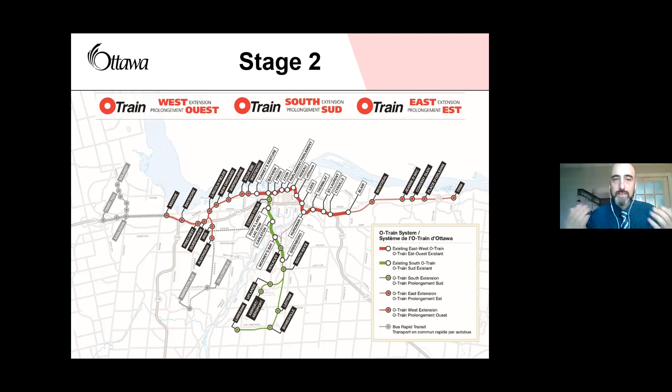The stage 2 project is an extensive and inclusive project. We take people all the way from Moodie to Trim in the east - that's an incredible feat. In the east, we only have 5 stations, whereas we have a multitude more elsewhere. We'll go into details here. In the south, we extend all the way down to Limebank, Bowesville, Airport. These are the major connection points as we bring more people into the city with the ability to get across downtown and out. This is the bread and butter of the stage 2 project.

In the west specifically, we have 11 stations and 15 kilometers of new track. For those of you who have the pleasure of living along or looking onto the river over the Parkway, or if you enjoy using the pathways and that infrastructure, when this system opens, approximately 500,000 bus trips annually will be removed from the SJAM Parkway. That's something special for a lot of people, even if you don't live there, I'm sure. That's a really nice bit for this.

Also worth noting is a tunnel from Kichi Sibi all the way down to Lincoln Fields, and another smaller tunnel in the Connaught Queensview area. Those are how our train is going to, after construction, impact fewer people and not impact connectivity, ensuring grade separation. It's all part of that.

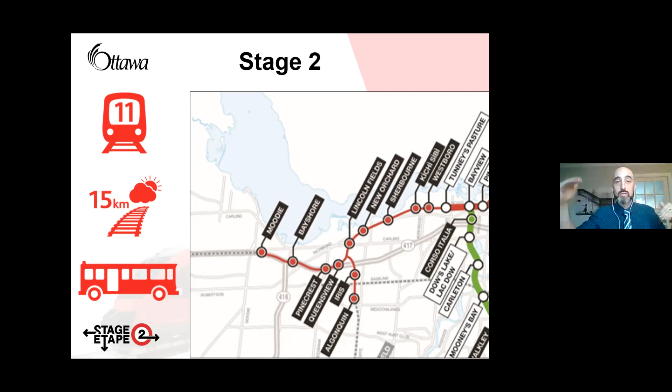The project is a design, build, finance project. We have Kev, who won the contract and signed to deliver the east-west extensions. T-Next is delivering the south extension, but that's not the topic of conversation today. Rideau Transit Maintenance is contracted to maintain the entire line, not just the 12.5 kilometers they built and opened in 2019, but the full breadth of the system from Moodie to Trim, as well as all the vehicles, current and new. That's to avoid any complications with, well, that was your train and that was your track, and who's going to fix it? Hopefully there won't be any of that with this model.

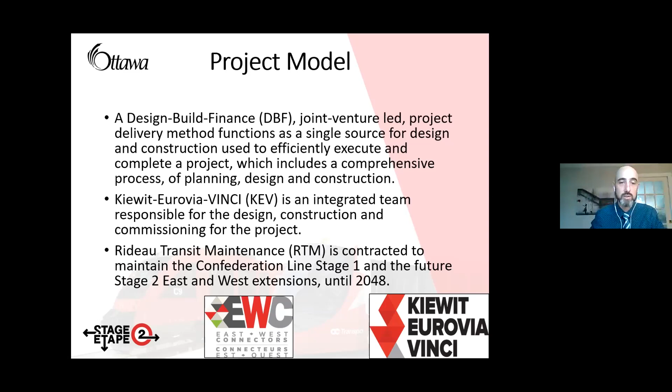I put this in here because I've received a lot of emails, and this is more of a housekeeping note. I understand impacts are great, especially right now in the Byron area. I've heard it, I understand. With 7 days a week of work, with hole ramming and rock breaking occurring on Saturdays and Sundays, it feels like not a lot of respite.

I'm sorry. Many of you have asked me, and many of you have asked Councillor Kavanagh, to have a day of rest, to force Kev to have a day of rest. Unfortunately, I'm not able to do that, Councillor Kavanagh's not able to do that, and Mayor Watson's not able to do that. The reality is constructors - LRT, home construction, road construction, you name it - have the right to work 7 days a week if they so choose. Ottawa city bylaws preclude and restrict overnight activities without the affected ward councillor's support, but there is literally no mechanism within the city to stop weekend work.

If you wanted to email your MPP, Jeremy Roberts, or contact Premier Ford, that is certainly an option. But unfortunately, we'll get into that more, what's going on. I just really want you to know what is and what is not within our scope and purview to assist with. I thank you for that.

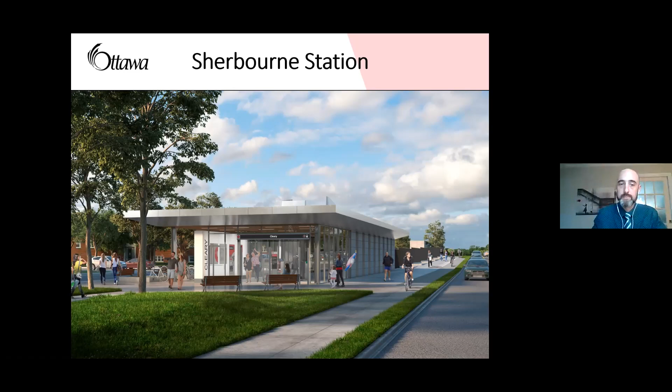The 13 days feels impactful. It is. Pedestrians and cyclists will continue to have the ability to cross the work zone safely. Vehicles will not. For vehicles wishing to cross the area in the west, the signed detour is Croydon Avenue, and in the east, the signed detour is Churchill Avenue.

A notice will be delivered. We are finalizing the information. Once that comes out, more precise information will be shared and posted online.

There was one other point I wanted to make about this - there's going to be quite a bit of impact, as we've seen with the Woodruff water main works that are occurring here over the last month.

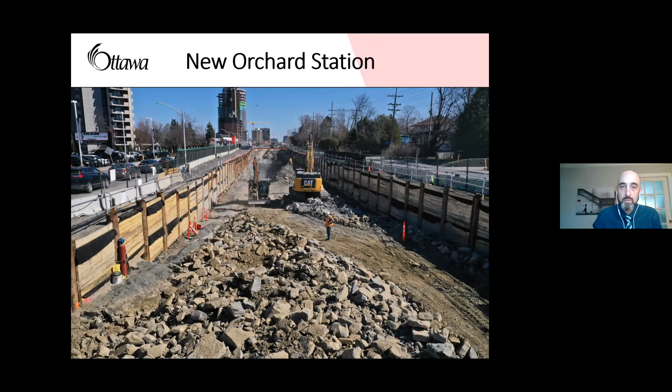Now, New Orchard Station is a station with 2 PPUDOs, 2 passenger pickup and drop-offs, just right here with restricted times. A little update for the community.

If you haven't seen my emails, there will be no other formalized parking on Byron west of Woodruff. I know there was some miscommunication with what was on our website, and I believe that has been resolved. We did have some issues with IT removing our information without telling us.

It's neither here nor there, and I apologize for any miscommunications the community had as a result. There will be 5 fare gates, 2 elevators, as with Sherbourne, 20 bike parking spaces, and 4 benches.

Clearly, it is an open air station. That means there is no roof to the tunnel. There will be shading or coverage above the platform.

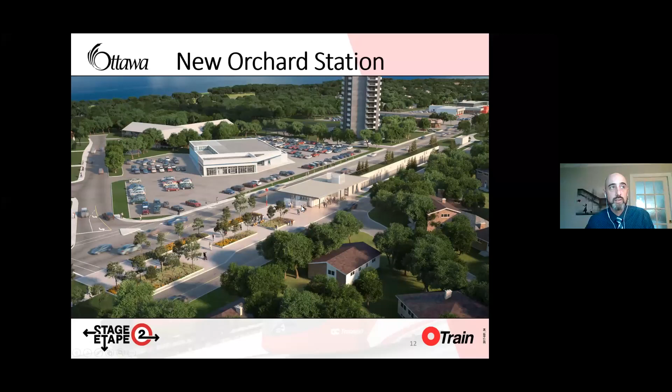As you can see, the only thing above grade here is the head house, the elevator shaft, the entrance, and fare gates. The rest of the infrastructure is all below grade.

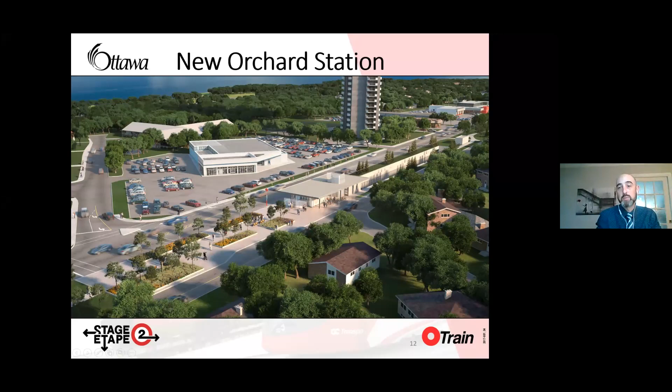Construction will begin in '21 and will be completed in '23.

They anticipate this 6-week work package to occur between May and July, pardon me. It is a 6-week package, with each section broken up into about two weeks each. Please understand, construction schedules do have a tendency to shift.

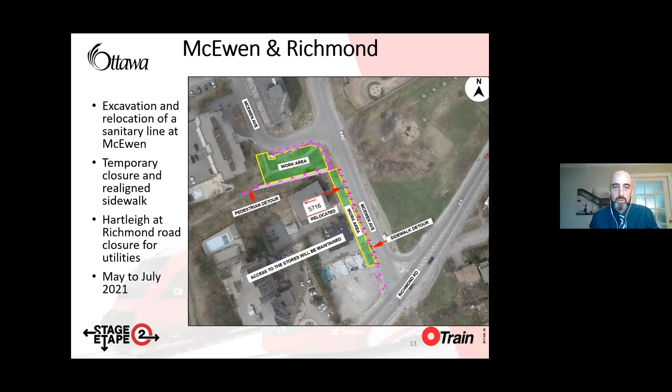Edgeworth storm, sanitary, and water relocations and replacements. Work has recently begun and is anticipated to continue until August. The work is to replace the storm and water, relocate storm and sanitary, and replace water.

Temporary widening has occurred over the ditches to allow for local vehicular access to driveways. The final paving of the road will follow the completion of the work.

Now, there's something else I wanted to mention. Driveways will be blocked, some periodically for 1 to 2 days, generally in a section of about 2 driveways at a time. This could occur up to 4 times.

This is not because of KEV. This is the way utilities are replaced and realigned underneath roadways, one at a time: dig, replace, fill up, dig, replace, fill up. It happened in front of my street on Iona. I didn't understand it at first, but now I do.

Hopefully, if you have any questions, you can connect with me and we can walk you through that.

Something I want to point out right now, something that has been in the works with KEV and the city, in order to help minimize the impact of construction vehicles on these streets. We are reviewing a plan, not yet finalized, to have KEV construction vehicles access their work site through a right turn, southbound, into Edgeworth.

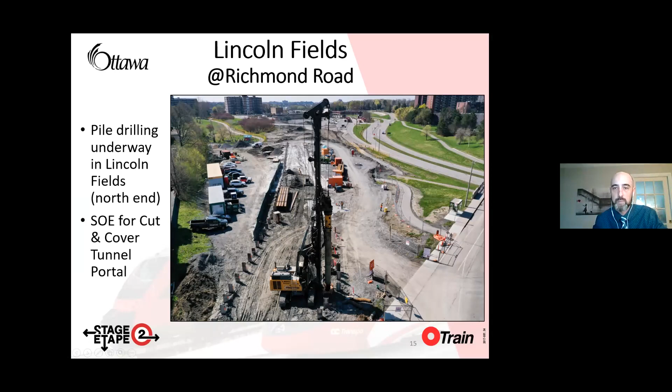Utilities are ongoing on Carling. You may have noticed some roadway realignments.

Lincoln Fields Station work started. It's pretty exciting, with pad installation. That's a huge moment, I'd say. That's what we're doing.

So to point out, MUP construction on the south end of Carling in May, Lincoln Fields Station, the existing transitway station, will be reoriented and completely rebuilt to function as a new LRT station. The train platform will be located under Carling Avenue. There will be 3 entrances: a station entrance from Carling Avenue, and an entrance...

Yes, a shared entrance between the fare paid side and the pedestrian side, as well as one on the west side.

A signalized pedestrian crossing of Carling will also help with safe crossings of Carling Avenue. And the existing terminal will be reconfigured to accommodate the passenger pickup and drop-off area.

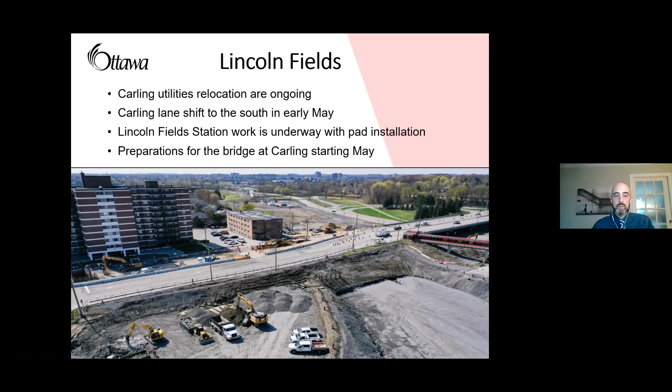This next picture will help demonstrate the future MUP connectivity around the infrastructure, Lawn Avenue Parkette, down along this way. Here we have a signalized intersection just where the MUP comes up that borders Rosewood Avenue. And this here is the passenger pickup and drop-off area that I just described.

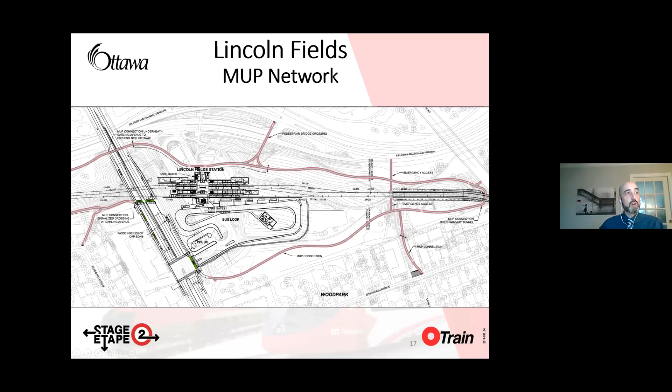This is the existing Woodruff Pedestrian Bridge. It will be replaced as part of this project. It won't be decommissioned until the new bridge is constructed. That new bridge construction will begin in 2021 shortly and will be completed in 2022. Once that occurs, we will commission the new infrastructure and decommission the existing bridge.

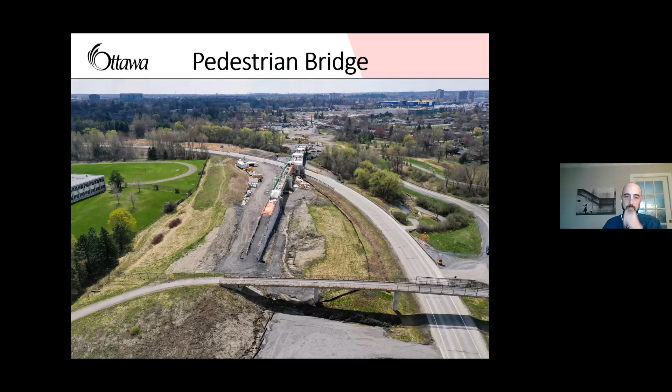And as we just saw from north of Carling, this is the current pedestrian bridge. This is the new alignment of the pedestrian bridge, connecting to similar MUP infrastructure, new pathways, and new connection points. Now the Connaught split structure, you can see right here with walls, retaining walls, decking, work ongoing.

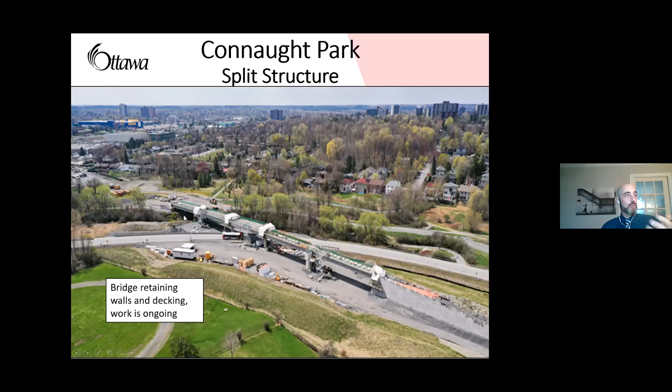So it's pretty incredible to see this level of progress on this project at this stage of the game. I think so. I actually will just go back.

No, I did get an email today from someone who was walking the pathways in and around this area. They noted that they were impressed at the progress, but more so, they were walking their young infant, well, maybe not so infant, but 9 months along the pathways. And she noted that some parts were less pedestrian friendly, but still manageable with a stroller. And then she pointed out that there were 2 flag women on radios who were beyond friendly, beyond helpful, and took the time to write into the office to tell us this.

I know that there are a lot of negative impacts to the construction of this project. Nobody really feels the need to give kudos. It's nice to hear every now and then, and I wanted to share that someone had a positive experience around the construction.

Queensview Station, here we have the Highway 417. I don't know if you got this, but here's our new highway signage. It's recently been replaced, a smaller sign with a much larger sign.

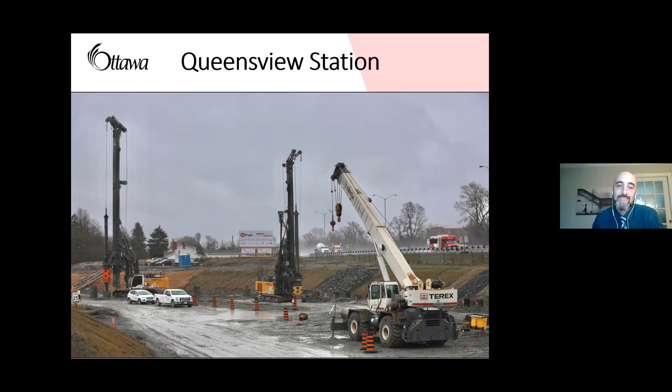Drillings of soldier piles can be seen at this location, and the soldier pile drilling is going to progress east into Connaught Park. At this point, it's still here in the Queensview Station area. Pile drilling underway through the summer, working up to Connaught Park, utility relocation underway, and pedestrian bridge utility relocation is ongoing. That pedestrian bridge relates to this pedestrian bridge for Queensview Station.

So just again, relocating utilities, which is part of our project to get the work done.

Now, Queensview Station is a new station. As you can see, it's just north of Highway 417. The station is going to have one entrance. Sorry, I keep pointing it on my other screen, so I do apologize, but this is the station entrance. And a new public access pedestrian bridge over Highway 417.

And access from the enhanced multi-use pathway and sidewalk system to allow access from Queensview Drive and Queensview Terrace North communities. And station construction will start in February '22 with a completion date of fall '23.

From Pinecrest to Moody, the activities start to repeat themselves. So we have a number of interchange or highway ramps that have been closed or require closure so that we can bring the alignment west or east, depending on which way you're talking. Right now we're talking west on the north side of Highway 417. So with ramp closures, sometimes it's just short-term overnight closures, and other times we're talking 9 to 13-month closures.

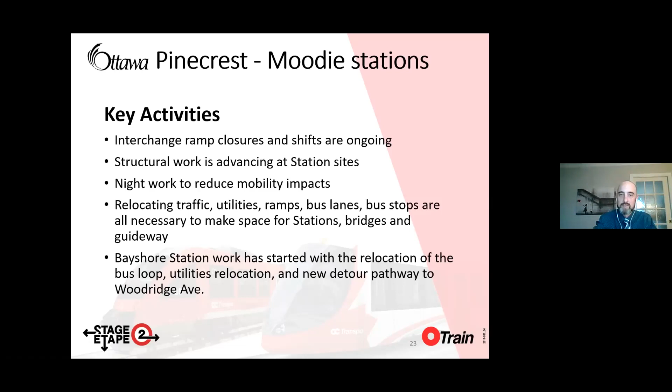Future Pinecrest Station, bridge and ramp construction work is ongoing. Summer bridge replacement. We'll have temporary road closures, and the ramp closure is in place, currently in place through December 2021.

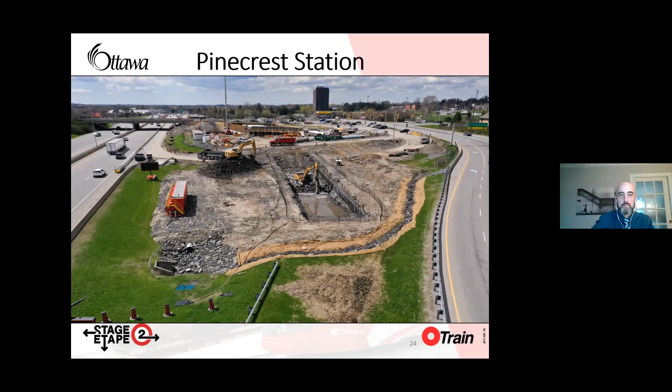And here we have bridge structure work progressing with parapet and concrete deck installation. I am blown away by this progress.

Having done a drive with Kev last summer, and talking about what the plan was for this, that's an incredible feat. Just pointing that out.

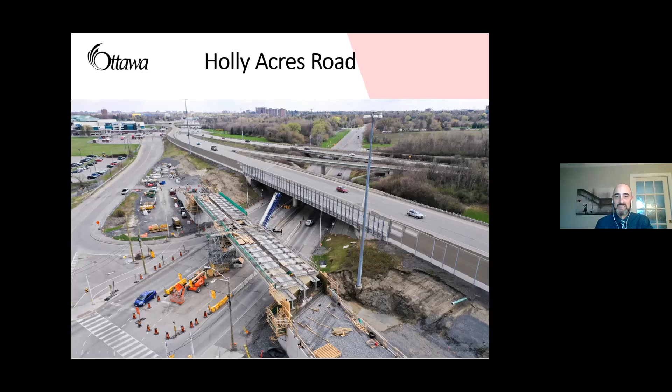At Moodie Station, we have new ramp construction ongoing with a ramp flip expected this spring. Moodie bus station area relocations to start in May through the summer, and night work in this area is ongoing.

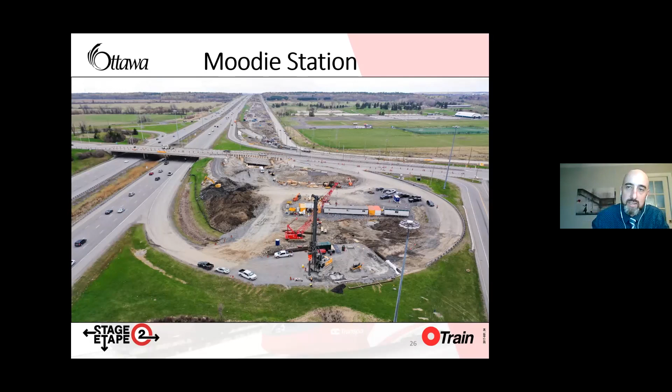I've received a few emails as of late about Moodie Bridge and the cycling conditions. I haven't replied to those emails yet, just working on this presentation the last couple of days. I will reply. Thank you.

Paul, Ian, thank you. The rail office had requested Sharrows be installed as part of our temporary detour and temporary works. Traffic services, the city of Ottawa, told us that Sharrows were not an appropriate function for the space, and instead to use share the road signs, which is what we've done. What we are happy to do is return to traffic services and inquire if they want to change their position, at which point we'd be more than happy to introduce Sharrows onto the road.

And I got the impression from those emails that that is something you'd like me to do. So that's something that we are going to do.

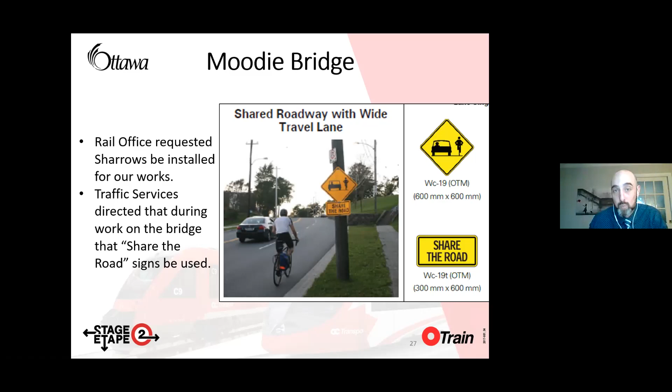Moodie Station area has a bus loop relocation, bus lane work, May 2021, with bridge work that is underway and is the cause of those emails. For those of you who use that bridge, you understand. If you don't, then we don't need to go into that for you. But we are working on that, and we do review it, and we do appreciate your comments, because it really helps us ensure that all the TCPs, or traffic control plans, if there is a shift, if all the elements have been adhered to. Sometimes we tweak our plans based on your feedback, and we thank you for that.

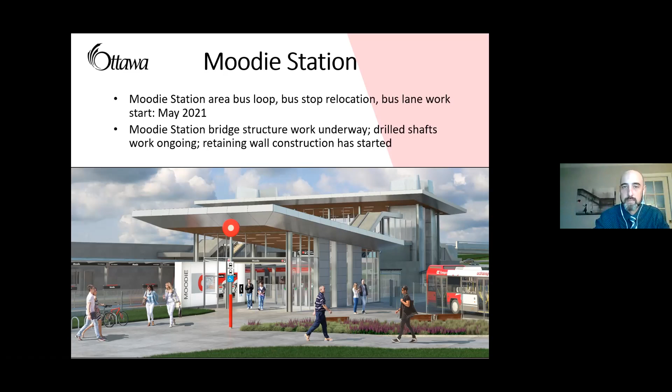The LMSF, or Light Maintenance and Storage Facility, construction to start in April of this year with rebar, concrete pours, and structure. More utility relocations, and Corkstown Road realignment.

That design is not yet approved. I understand that a lot of you have been waiting and asking for a year for that design and answers. And I'm not trying to be flippant, I'm not trying to stall. But if a design's not approved, then there is no design and there's no information for me to share. I anticipate in the coming weeks, and I'm excited to say this, I heard something on a call today, that there's going to be some T's crossed and I's dotted. And that will be an opportunity for us to advise Councillor Kavanagh, her office, and the community at large. I thank you for your patience while we wait for this information.

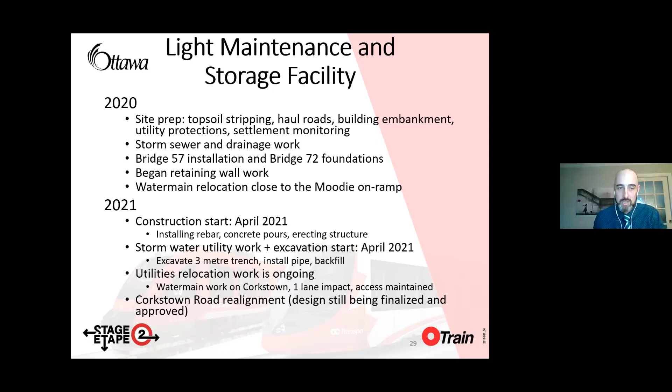Sand, Damon? Why would you have sand in a train? Well, sand helps grip of metal wheels on metal tracks, and trains have sand.

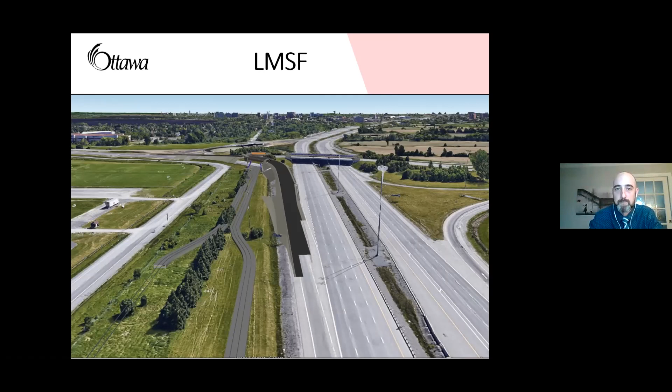I now have some news that I do not like sharing. There was a connectivity review, or connectivity 2.4, that was undertaken in 2020. In 2020, it was proposed that we could consider a MUP on the west side of Moodie Bridge. At this point, that MUP will not be built by East-West Connectors, or KEV. The cost to do so would be too high. But Stage 2 believes in this connectivity, this piece of infrastructure. And we're reviewing an opportunity to construct this MUP ourselves.

We don't have any finalized solutions yet, but we are pursuing them. So while we are not delivering this as part of the Stage 2 project with KEV, we do hope we are able to deliver this element of the project for you, as we do believe in the importance of this connectivity. Furthermore, transportation planning is leading a feasibility assessment of extending this MUP along the west side of Moodie from the bridge all the way to Bell's Corners. So that would tie in.

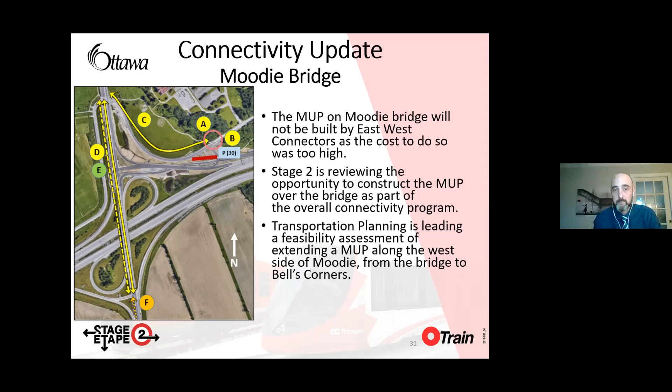Okay, some facts, some impacts, and some mitigation. Daytime operations, 7 a.m. to 10 p.m., Monday to Saturday. Generally speaking, even Saturdays, not that often. 10 p.m., not that often. Mostly, KEV, like you or me, when we have the option, likes to close shop and go home to their families at 5 o'clock. When schedules or other things necessitate, they might have to push that, get another crew to work until 10. That is not their interest, not their day-to-day.

Sometimes it's required, just as night work sometimes is required, but mostly it's not. KEV doesn't want to do night work if they don't have to, and they don't relish impacting residents. Night work costs more money for KEV to undertake. KEV is building this project for the city for a profit, so obviously it doesn't make sense to spend more money when it's not necessarily needed.

Connectivity will be maintained. There may be delays, there may be detours, but connectivity will be maintained. Your safety, worker safety, is paramount in the eyes of KEV, in the eyes of the city, in the eyes of your councillor, and in your eyes as well. We respect that you respect construction signage, and we thank you for adhering to those signs during this work.

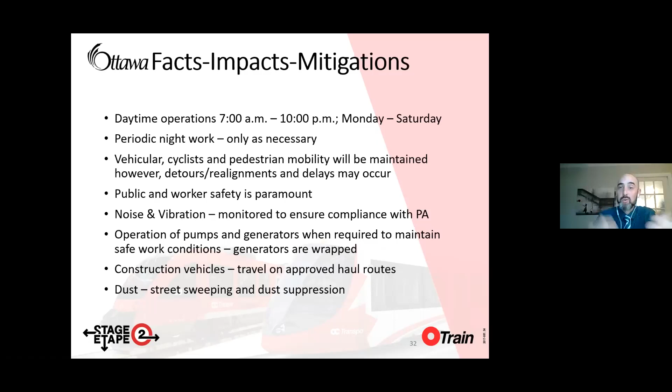Lastly, dust. I think it's going to be a warm, dry, dusty summer. Kev will be managing dust suppression as well as street sweeping. We are looking to you to let us know: do things get really bad on the weekends when we're not around? Let us know, and we'll make sure suppression efforts are made. Are there areas we haven't addressed that need addressing? Let us know again, we're partners in this. We're team members, and you help me, I help you, Kev helps us. It's important we all play our role.

I talked to you about overnight work a few slides ago. Truly, there are emergency situations, sometimes scheduled, but this is not the day-to-day. It is not expected. In our project agreement, we encourage work to occur in the evening or overnight when it could impact our mobility on the roads. So that's by our own doing, to support the city.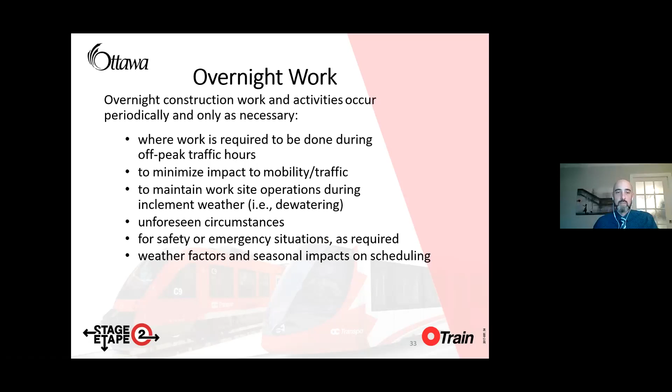Lastly, my name is Damon Berlin. This is my contact information. Many of you have it, some of you don't—please record it, and please feel free to use it. It's important that I understand the problems, and that I can communicate with Kev what you share with me, so hopefully we can find resolutions. It's not always possible, but I'll always endeavor to give you a strong rationale as to why or why not we can do what you're asking.

At this point, I'd like to thank you all for listening to me drone on for the last 40 minutes. This is not an easy thing to do. In person, I like to feed off the crowd. Right now, I feel bored of my own voice. So I'm sorry, and I thank you.

Councillor Kavanagh: Thank you, Damon. That's a lot of information to put into 40 minutes. I've noticed that you've responded to the questions we've received, in a very broad way, and also in some specific ways. So I'm going to start, and because we've got a ton of questions to go through, I am just selecting the questions. I'm sorry, but comments, Damon can look at them and read them, but we're going to just go with questions right now.

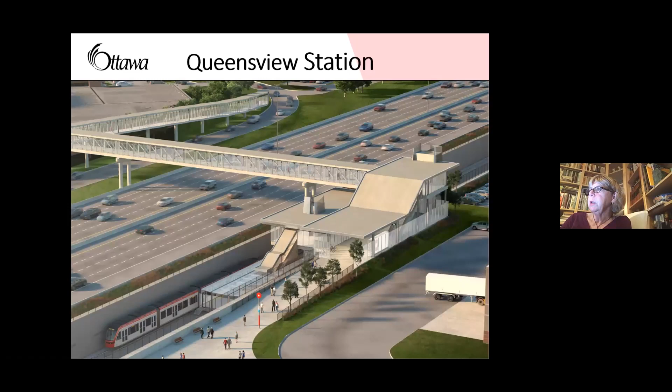Someone's asking about slide 6, because this was asked during the presentation. Can you clarify what the green path between Richmond Road and Lincoln Fields Station means? When exactly does the train go through from being tunneled to above ground? And if the train becomes above ground abruptly south of Richmond Road, how will the path connect under the bridge once the train exits?

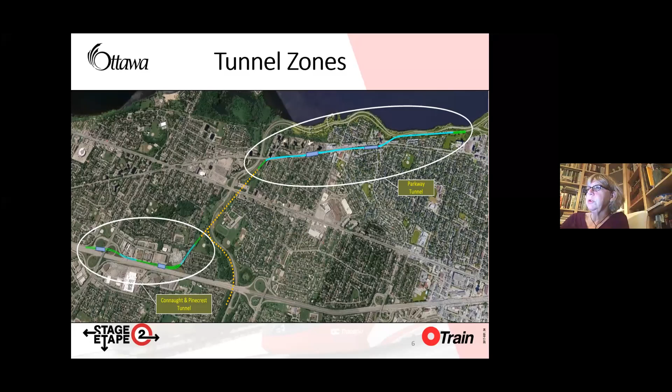Thank you. And for the pedestrian area for the work zone for the 13-day closure of Woodroffe, will they be monitored by police for safety?

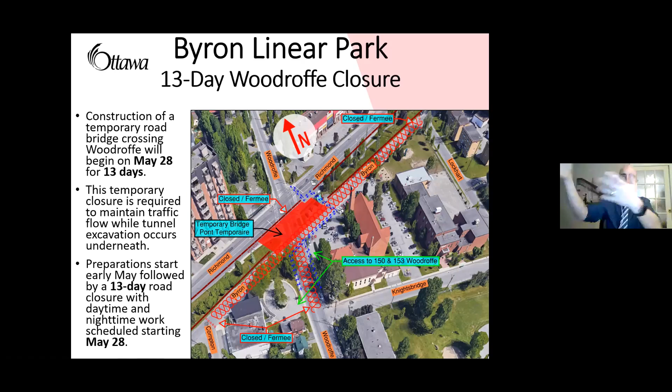Safety - so this right here, this is through a work zone. A work zone is monitored by constructors. They are required to protect their spaces from errant pedestrians, cyclists, or kids. You'll just imagine a fence, and you'll walk through a fence corridor. For any of you that existed around Bayview Avenue, Bayview Station construction in stage 1, many of those MUPs went through construction areas. At that time there was work over them, so there were shields above and fences on either side, and that's how pedestrians will get through.

Campbell, I don't think police are required for this closure because it's static, but I will defer to you, sir. That is correct, Damon. So once this closure goes into place, we are going to be in a static operation - there's not going to be 24/7 police presence for the entirety of the 13-day closure.

There will be police required when we instate the closure and when we remove it, as whenever there is a special need to control traffic at a traffic signal. But once the zone is set up, it will be set up and left there. And as you say, Damon, it's the contractor's responsibility to secure their work zone, and consequently it will be secured to prevent any members of the public getting in there accidentally or otherwise.

I would like to point out, thank you Campbell and thank you Councillor, but this is a very important thing for the community. I know that things happen - fences fall down, people push them, wind pushes them, whatever the case. You're my eyes on the ground. If you see something that is unsafe, you need to let me know. Jaimie is a responsive individual - I get him on weekends, at nighttime. Councillor Kavanagh is always emailing me on weekends, and I'm quickly sending them over to Jaimie. I got great people here, and they're looking out for you, and so am I. I want to thank you.

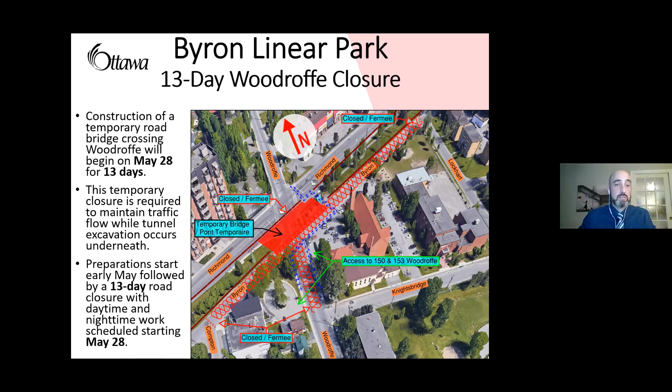Thank you. Will there be any parking at Lincoln Fields Station? There will be passenger pickup and drop off at Lincoln Fields Station. Much like now? Yes. It's not parking. No, we are not creating any parking spots east-west.

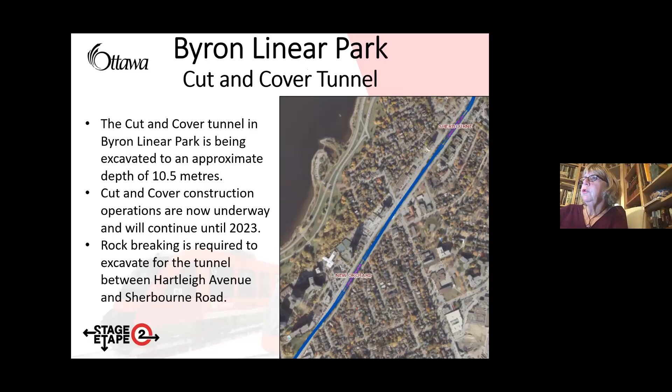So for dog walkers, this is good news. It's also good news for the Woodroffe High School principal, because it was a conflict to have walking through their property, and there was nothing the city could do in response, since it is their property. That will no longer be an issue, because the bridge will be connecting directly at the bottom of the property. And I do believe that with no students in schools right now, it's probably not a problem at this moment either. All things being equal, we're probably not going to have any school until the end of June.

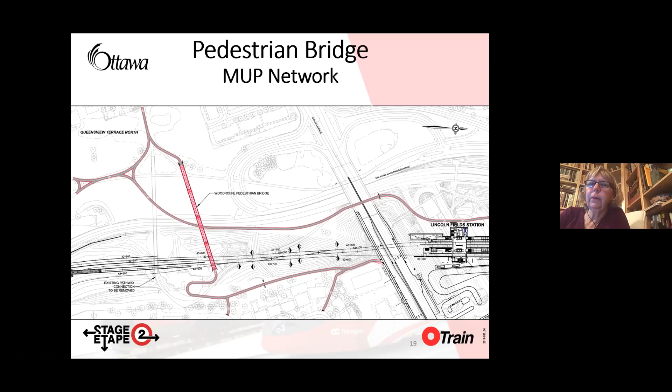I just want to give a special thank you to the staff, Damon and Rosanna and Jaimie and everyone. When I started out, it was difficult to get information because we didn't have enough staff. Frankly, Damon was there, but it was a lot of work trying to keep up with everything. I appreciated that the city made good sense to bring in more staff, and it's made our lives easier, just to get to troubleshooting, because things happen — things we didn't plan or expect. This is a major construction site, and you guys are the most affected in the city. Damon and I have talked about how close this is to residential, closer than anywhere else on these projects. We've taken a look at that, and I've talked to Michael Morgan about it. So you are greatly affected.

The other side of it is you'll have that station right near your homes, so it's a lot of pain for a lot of gain. I thank you — it's not been easy, but you're hanging in there. So thank you very much, Damon. I know you worked really hard on all this stuff, and we had a lot of last minute information to go through. This is massive, and I appreciate it. Thank you for all your hard work. Thank you to the team.